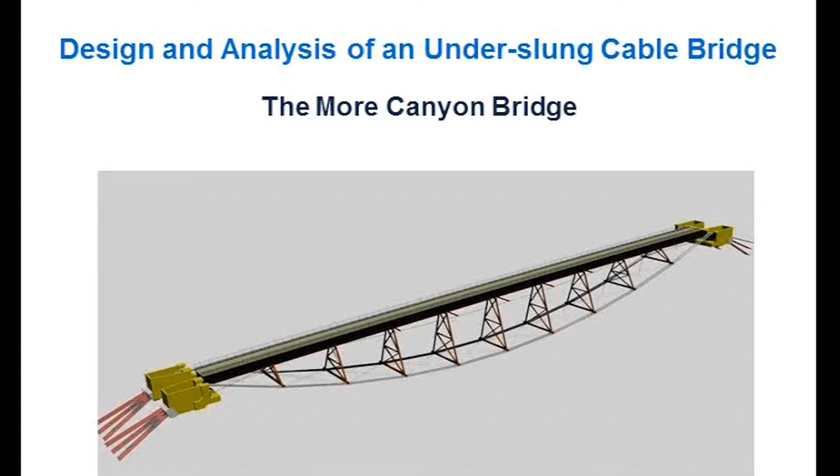The main topics we'll be discussing today are the challenges involved in the design and construction of an under-slung cable bridge. These challenges include the derivation of the main cable shape and length, the construction sequence of the semi-rigid structure, the girder launch itself, and the dynamic response of the bridge under wind and live load.

Do you have a question?

Hello. The owner of the bridge are the Galore Creek Mining Corporation.

Okay, actually, we'll answer that question at the end.

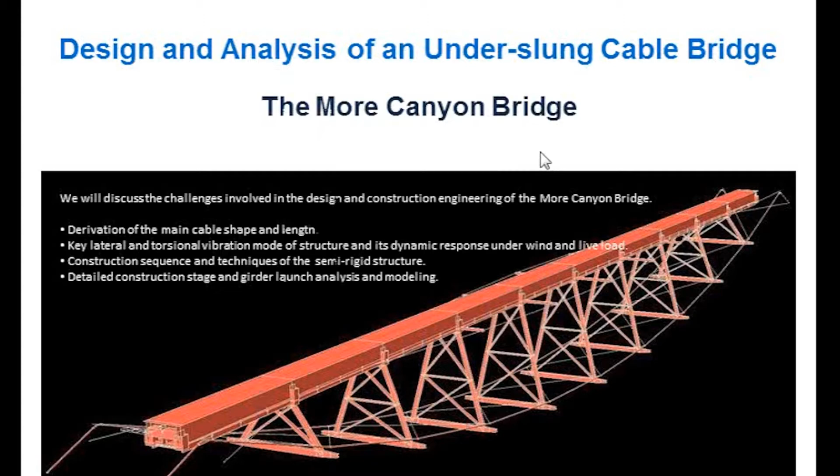Before we start on details, let me give you a brief description on the background of the project. The More Canyon Bridge is a part of the Galore Creek Mining Project located near northern BC, near Bob Quinn and Stewart. It's part of a mining road that will service the Galore Creek mine.

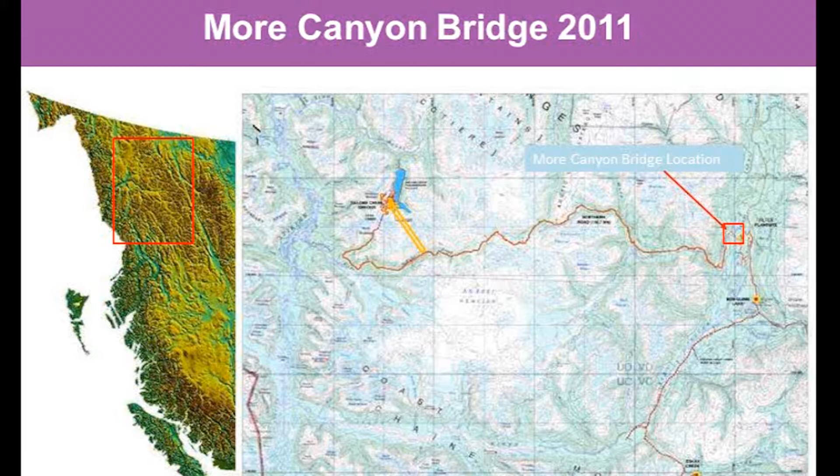The More Canyon Bridge will span an 80-meter deep canyon. It's a 200-meter clear span underslung cable bridge. Apart from the geography of the site, the project's complicated by high winds, which are funneled down the canyon, heavy snow accumulation during winter, and a steep mountain rock face.

The underslung cable design satisfies the criteria. The bridge is to be constructed at the top of the canyon with skylines, and the main girder is to be launched onto the semi-stiff structure composed of the main cable and the launch girders.

Now, due to the nature of the design, the bridge requires a unique construction sequence and could potentially be sensitive to wind and live load. Because of these concerns, a comprehensive study of the dynamic response of the bridge was completed during the design process, resulting in a design that greatly exceeds a scope that's typical of a 30% design.

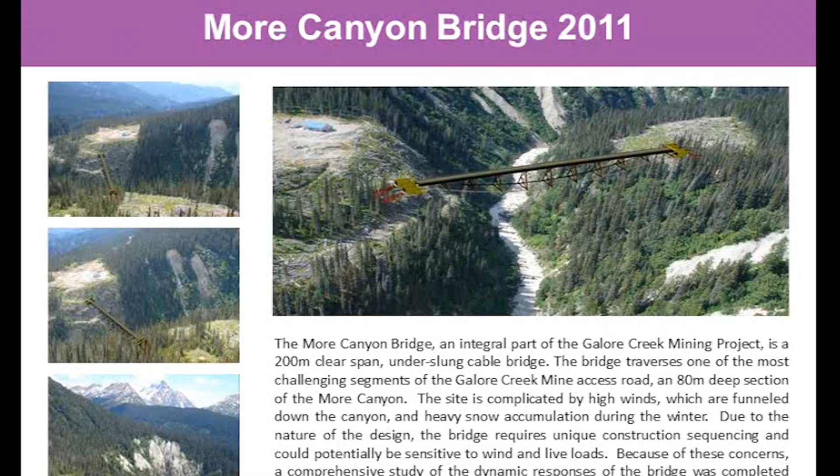Now, the bridge is composed of two 2.5-meter deep composite main girders supported by vertical struts at 20-meter intervals. The main cable system consists of two groups of four 105-millimeter diameter cables. These groups of cables sit 14 meters apart and are cross-braced with 35-millimeter diameter cables to provide a strong lateral truss system. In addition, there's two 75-millimeter diameter wing cables at the elevation of the girder.

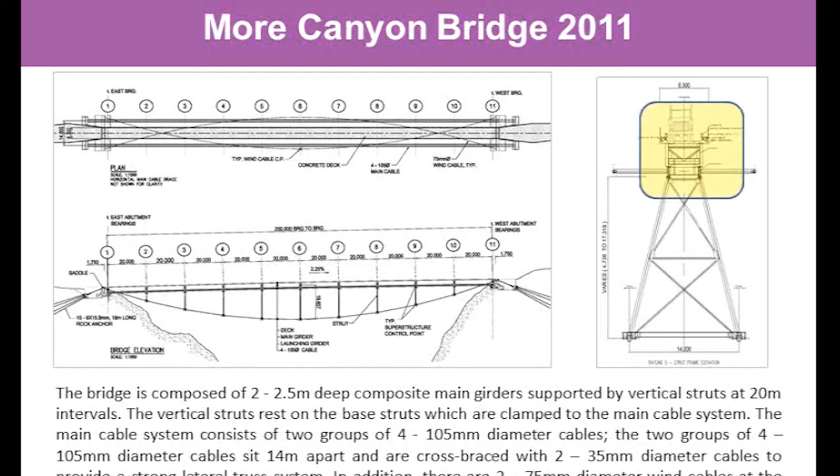Let's have a closer look at the roadway details. Here we have the composite main girders supported by vertical struts at 20-meter intervals. The main girder sits on top of the launch girders. We'll later see how the launch girders will first be erected to create a semi-rigid structure as a base platform for the main girder to be launched over.

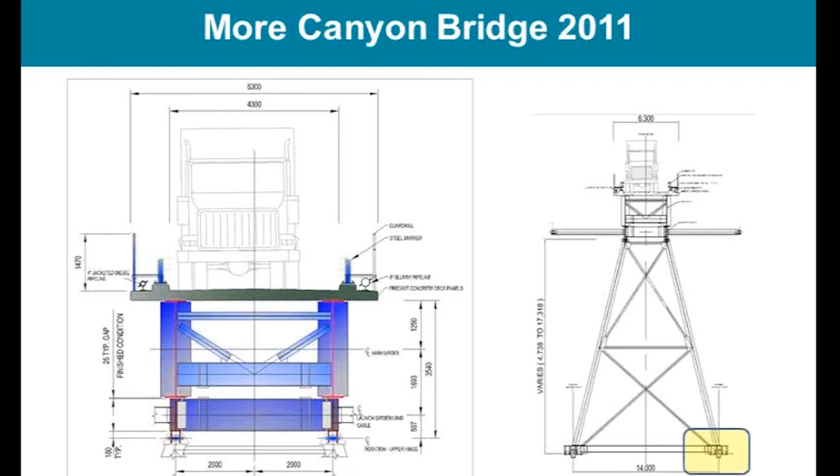The height of these vertical struts varies from 4.7 meters nearest to the abutment to 17.3 meters at the midspan of the structure. At the bottom, we have the struts sitting on the base strut units, which are clamped to the main cable system.

Here we can see the rendering of the strut and clamp system, as well as the cross-bracing cables. The cross-bracing cables are both over and under the main cable system. This ensures that all resultant forces will go through a common work point in the system.

Initially, the strut beam was designed to be hung from the main cables. You will see that in most of our model studies. This design was later changed in favor of having the struts sitting on top of the main cables.

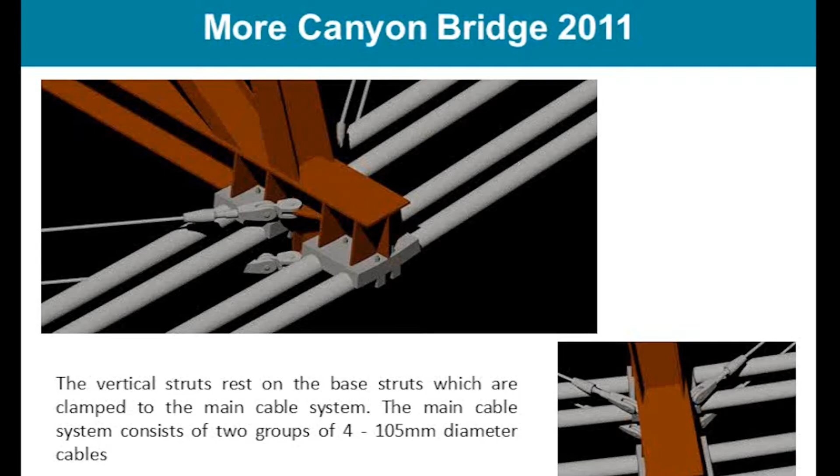A key component of the More Canyon Bridge project was the implementation of MIDAS as the primary analysis software. MIDAS excels in the analysis of cable structures with an accurate ability to model the nonlinear behavior of the cable stays.

With the shape and string length of the cable highly dependent on the weight of the bridge, an accurate accounting of the bridge elements and their weights was established early in the project. We wanted to use the suspension bridge analysis control in MIDAS to derive the main cable length, shape, and tension in the final condition.

Now, an obvious difference between the underslung cable system and the suspension system is that the tension forces in the hangers are compression forces in our case, in the struts. Other major differences also include the absence of backspans and towers.

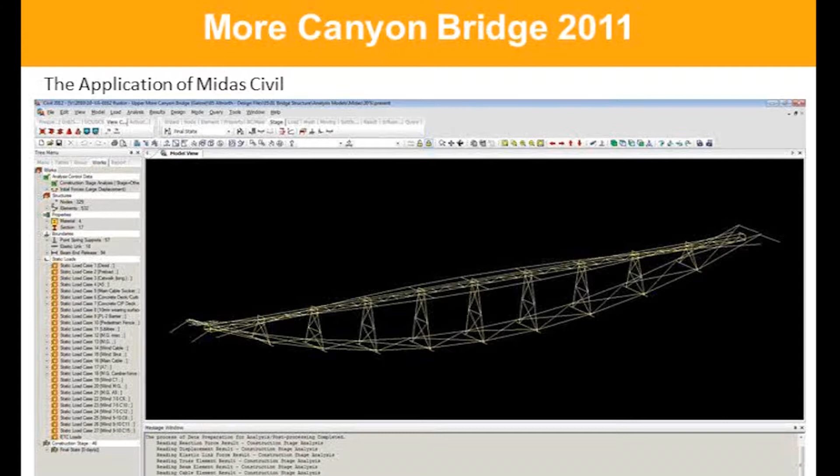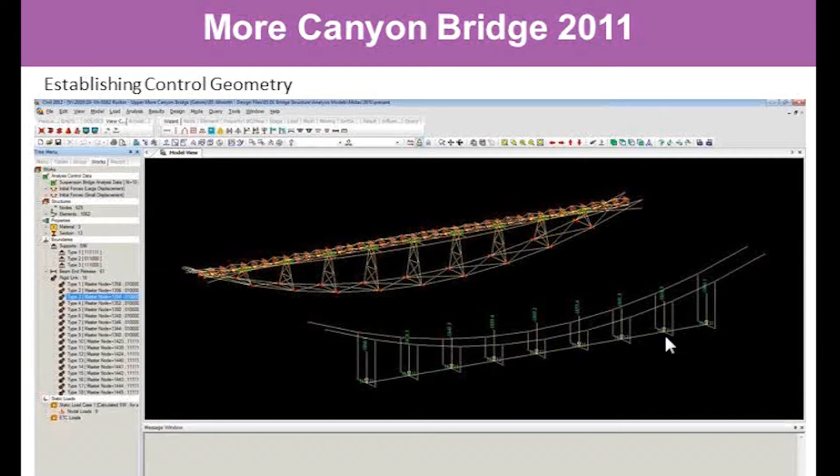Due to these differences, or just our input error, the suspension bridge analysis control was initially unable to compute the shape and tension in the cable based on the underslung arrangement like you see here. So what we did was create a suspension model based on our dimensions, along with the calculated dead loads applied along the bridge. We ran the suspension bridge control, and sure enough, it gave us the shape of the cable and the initial stresses. We then took the cables, deleted the suspension elements around it, and surgically connected the cable to our structural system, as you can see here.

Now these establish the first iteration of the forces in the main cable. They include the equilibrium element nodal table, the initial force for geometric stiffness table, and the initial force table. You can find a tutorial from MIDAS on how these tables are produced. With the use of the suspension bridge analysis control to determine the control geometry of the bridge, this is established under an idealized suspension system, where the deck and main girder is only used to account for the weight and not for the stiffness. So having established the initial forces and the shape, we introduced the data into the construction model.

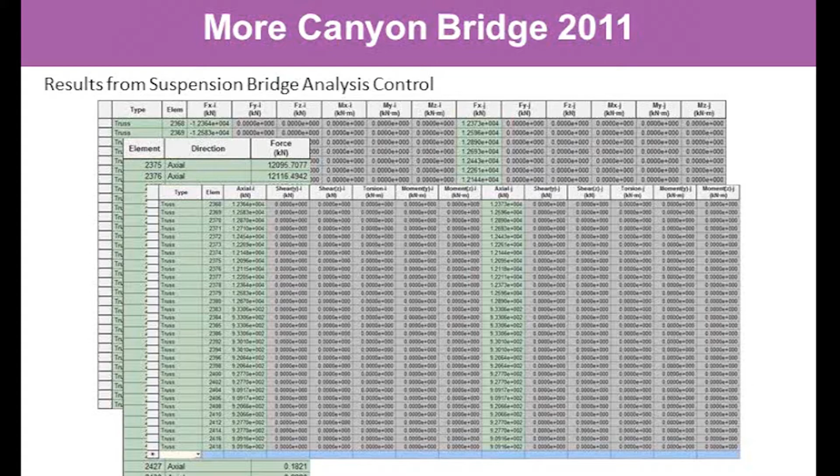The basic boundary setup of the construction model is shown here. We have pin support at the end of the cable where it's anchored in rock anchors, and roller supports at the end of girders. Also roller supports to simulate the saddle over the abutment back walls. Here you can see a rendering of the saddle structure.

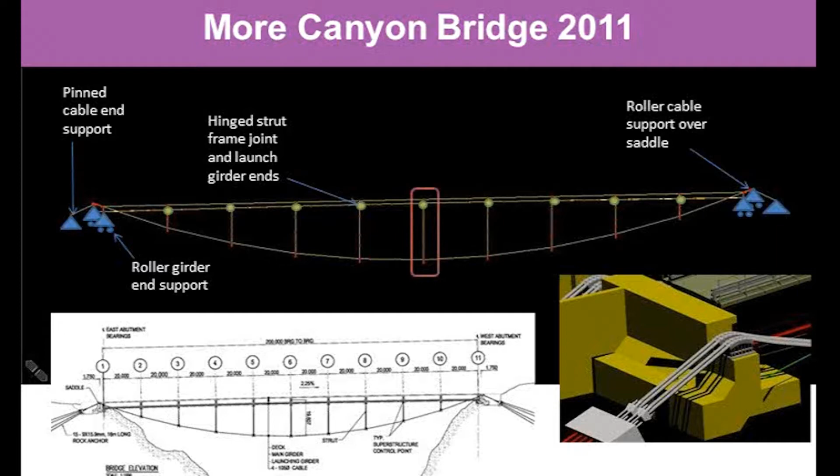The strut frames are hinged at the top where they're connected to the bottom of the launch girders. And the launch girders are hinged at their end, so they're simply supported spanning between strut frames. Let's have a closer look at the cross-section of the bridge.

As mentioned before, in an earlier version of the bottom strut beam design, the bottom strut frame is to be hanging from the main cables. This makes for easy construction because the bottom strut beams will naturally want to hang plumb, making installation with the strut frames easier. But the hanging pendulum effect will lead to no convergence in the model due to the fact that there are too many degrees of freedom in the system. We get around this problem by using an elastic link between the cable and the bottom strut unit and adding torsional stiffness in this link.

We used a single line element to represent the group of 4 main cables at each side of the bridge. This element is located at the geometric centroid of the cable group. We also used a single line element to represent the two composite main girders. This was done in order to properly capture the torsional stiffness of the box created by the main girder and its lateral bracing system. The torsional stiffness of the box cannot be captured by simple line elements laced together by bracing members.

The torsional stiffness of the main girder system was captured by creating a separate model, modeling the girder and the deck using shell elements laced together with lateral bracing elements, then applying a unit torque at the end of the box, which induces rotation. The torsional constant of the box is then computed using the following formula: J equals TL over theta G, where J is the torsional constant, T is the unit torque applied, L is the distance from the rotational fixity, theta is the angle of rotation, and G is the shear modulus.

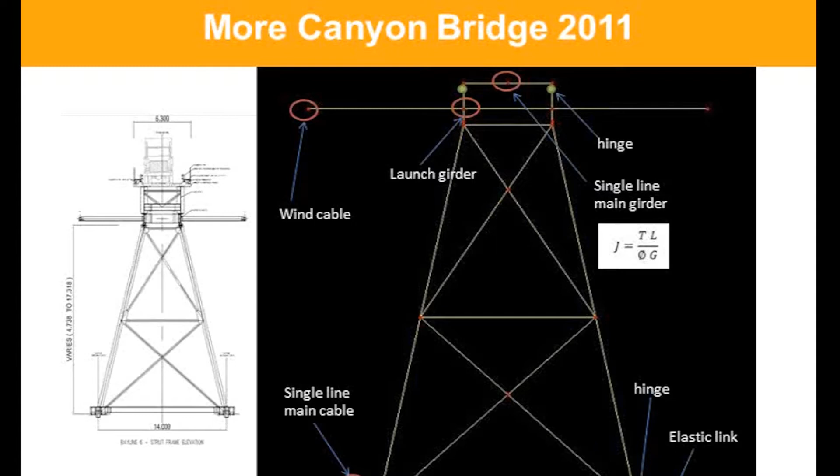This torsional stiffness was particularly important for this project because of the dynamic effect of wind and live load, which we'll later go into with more detail.

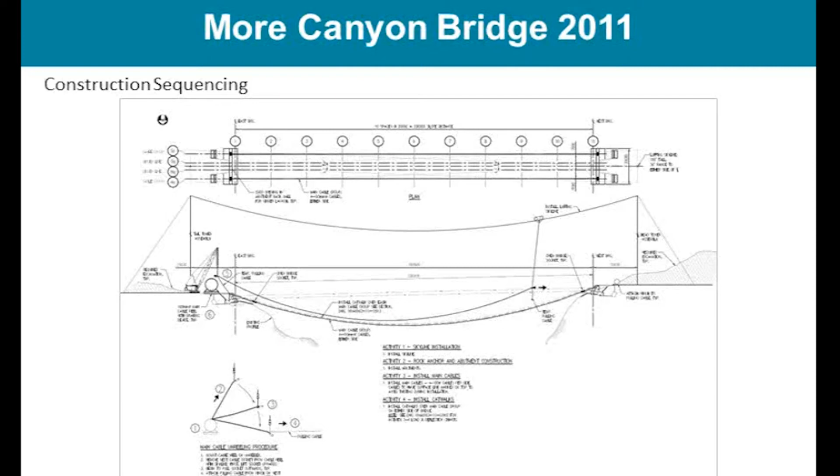It all starts with the construction of the abutments. Groups of 15.9 millimeter diameter strand anchors are embedded 18 meters deep into sound rock. These will provide an anchorage for the main cables.

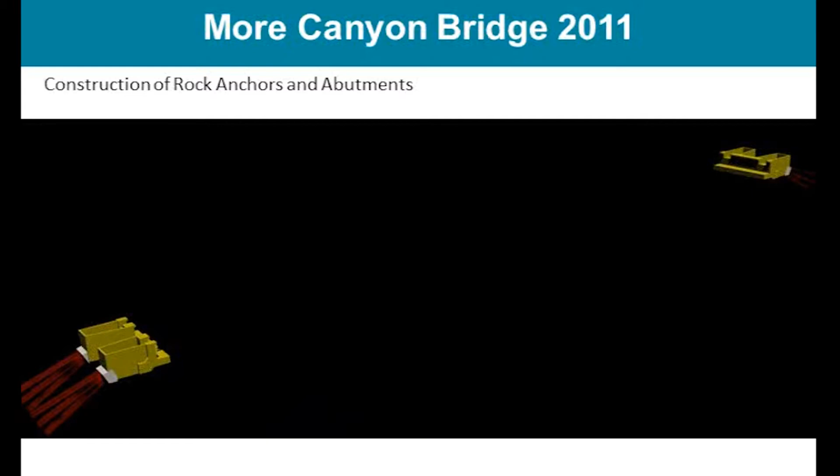105 millimeter diameter main cables are laid into position one by one. The initial position of the cable is approximately 1.2 meters higher than its final position due to the lack of dead load at the initial stage. Additional dead loads come at a later stage and will induce tension in the cable, hence elongating it.

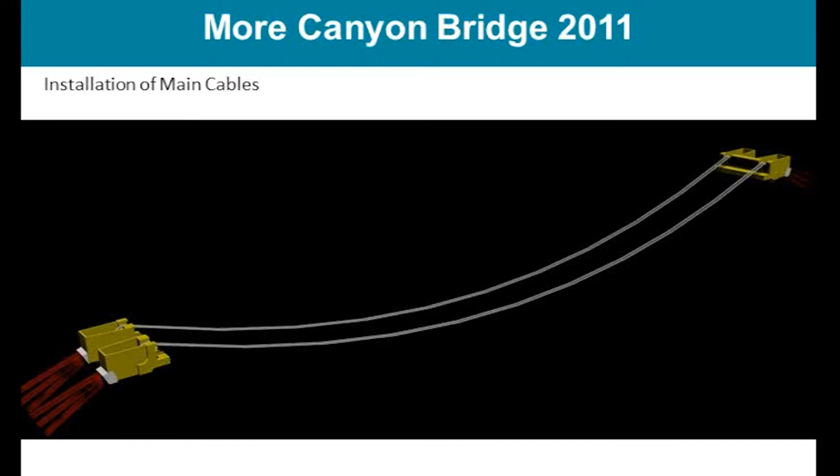Catwalks made of timber and welded wire mesh will be installed along the two groups of main cables, creating a 1.8 meter wide work platform along the two sides of the bridge.

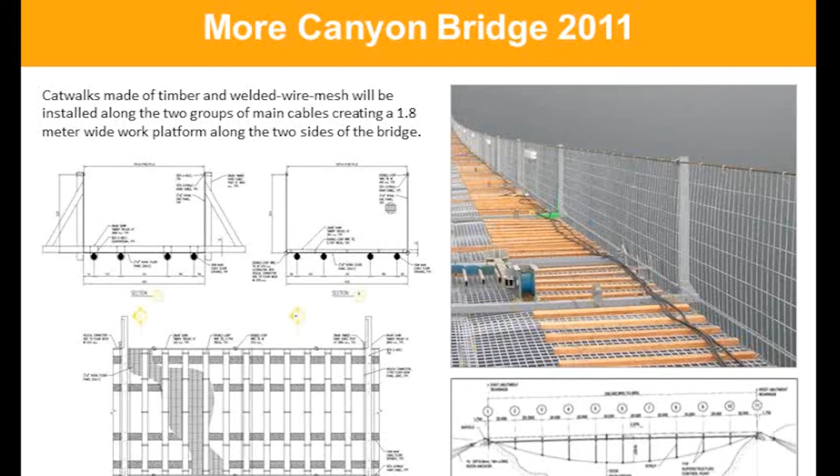The bottom strut beam, along with cable bracing, are installed bay by bay to create a strong lateral truss system and a base platform for future work to be built on.

The exact location of the bottom strut beam will be marked on the cable prior to shipment. This is done because the length of the cable will change depending on the construction stage, as well as the elevation of the cable will change.

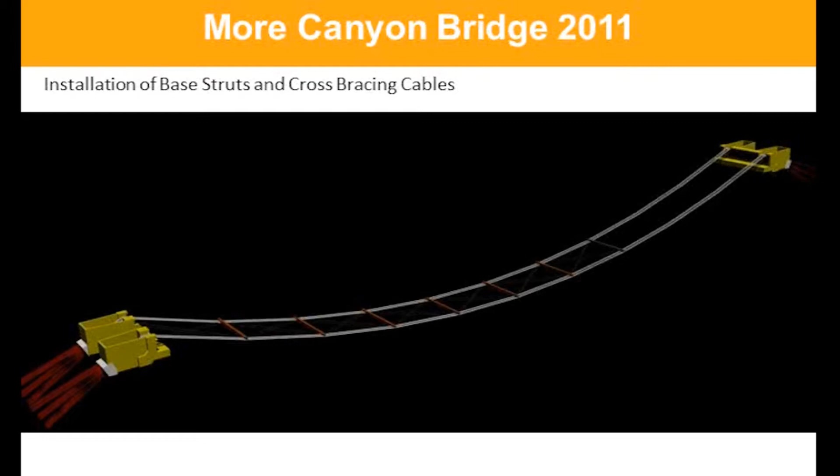Preloads of approximately 8 tons will be hung at each end of the strut beam. The preloads apply additional weight to the system. They stretch the main cable, making it stiffer, and also close the gap between the final stage elevation and the current stage elevation. This elevation change is required due to the rotational tolerance on the members to come.

Keep in mind that each joint installed at the construction stage will need to allow for rotation due to the constant changing of the geometry of the bridge.

The preloads may either be bags of sand, lock block, or water. With these preloads, we can create favorable geometry for future construction stages by adding or removing preloads at certain locations in order to raise or lower the position of bay lines.

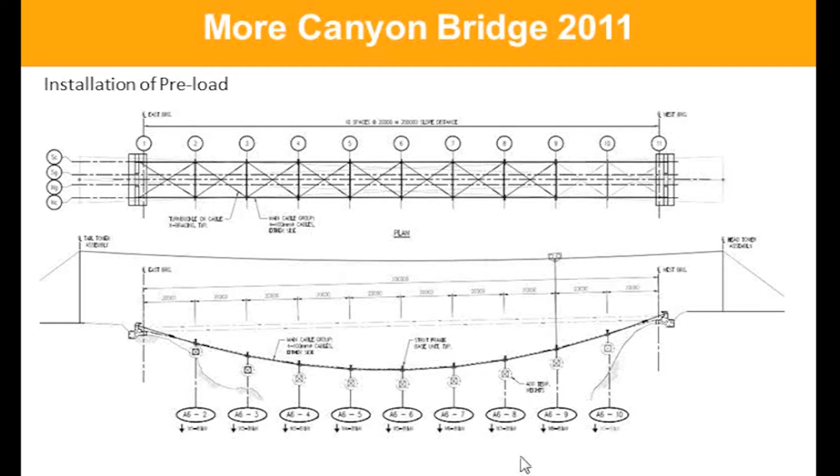The strut frames, as well as the launch girders, are installed bay by bay, starting from bay line 10. The launch girders are installed with a hinge at each bay line so that the system is flexible. The launch girder and the strut frame are to be lifted at once along with their bracing system.

The free end of the launch girder is pin connected to the adjacent launch girder. The system is then slowly lowered onto the bottom strut beam with Tirfors to ensure that it's in line with the bottom strut beam.

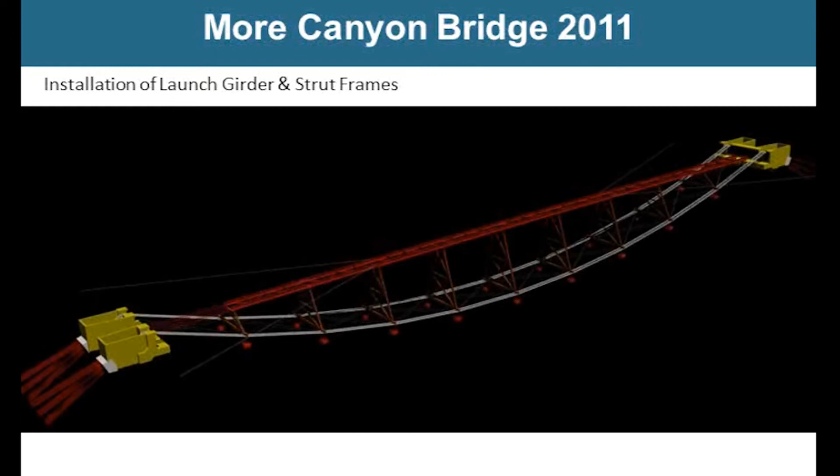The angle at the top hinge at each stage of construction is checked through modeling to ensure that no clashes occur. Cable saddles have a radius on them. By checking and keeping the cable within that radius, we ensure that no excessive stress is applied on the cable during the construction stage.

Wind load at the construction stage is particularly a big concern due to the fact that a significant amount of weight and surface area is added to the structural system, whereas the lateral system of the launch girder cross-bracing is incomplete until the last segment of the launch girder is installed.

During a wind event, the launch girder is essentially cantilevering from the fixed support at the west abutment. At this construction stage, the launch girder can experience the largest deflection. In order to reduce this deflection, wind cables are introduced into the system.

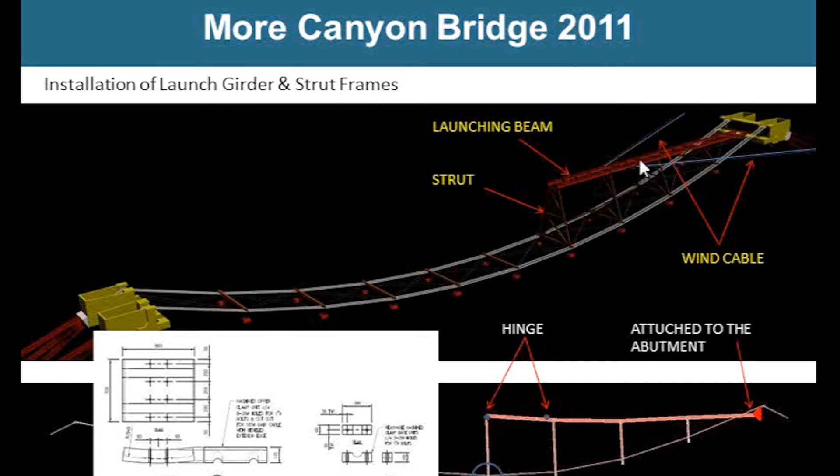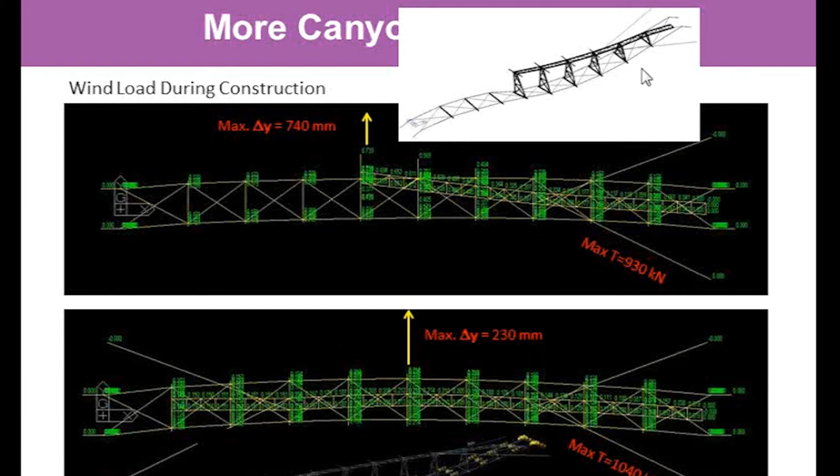Next, the wind cables are installed, strengthening the lateral bracing system at the girder level prior to the main girder launch. Now that the launch girder is complete with its lateral bracing system, it will become a launch platform along with the main cable system.

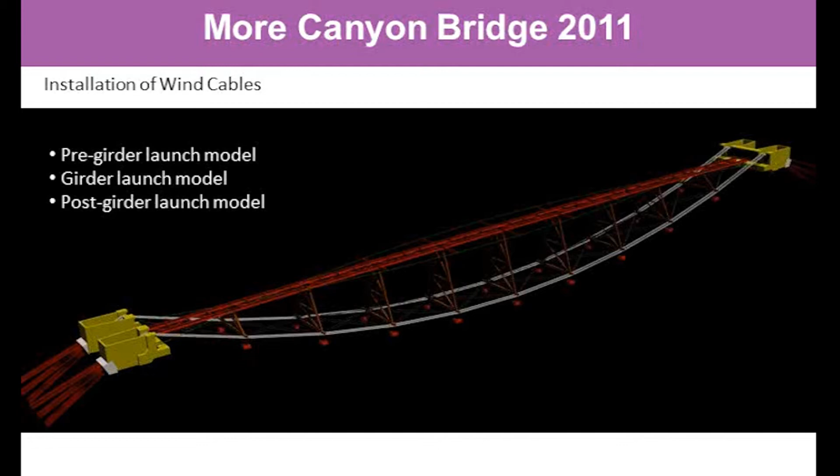To simplify each of the models we're working with, the construction stage model was broken down into three models: the pre-girder launch model, the girder launch model, and the post-girder launch model, which also includes the post-CS analysis of the bridge. So let's have a step-by-step look at the deflection of the structure in Midas.

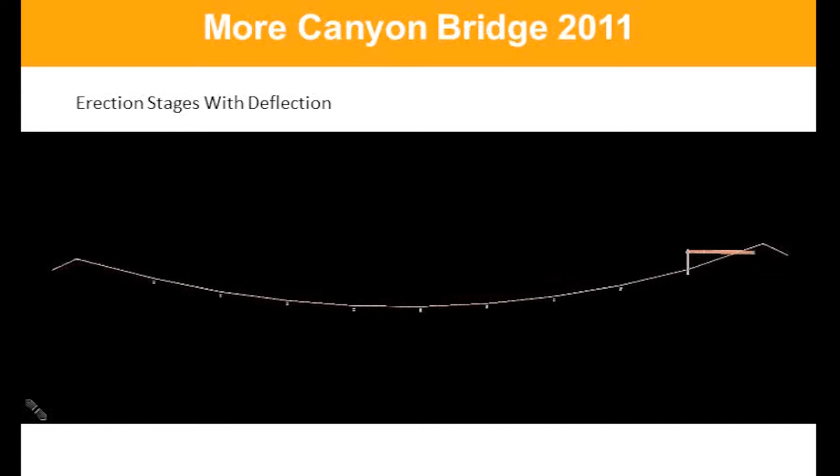The tuning of the preload arrangement through the construction stage had yet to be refined at this point of the analysis. Right now, all preloads are present at the stage after the installation of the strut beam to the end of the girder launch.

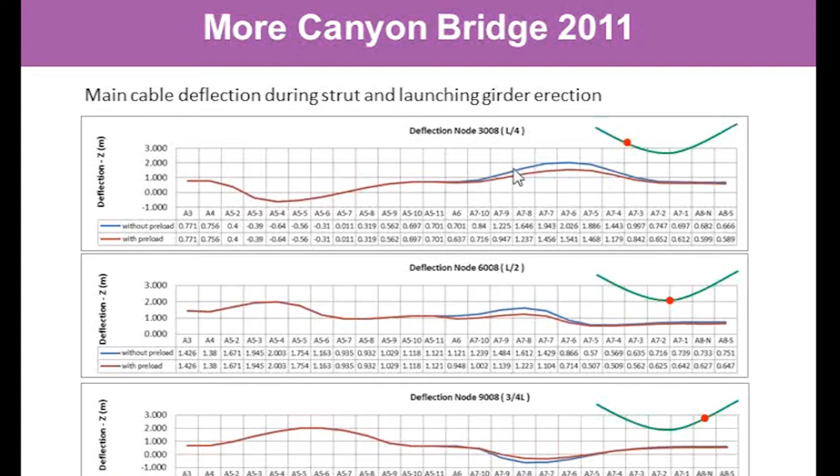There are a number of variables, challenges, and solutions to this procedure. The flexibility of the semi-rigid system composed of the main cable and the launch girders will deflect significantly during the girder launch. This soft platform creates a challenge since the support condition, elevation, and stiffness will be constantly changing. But several solutions have been utilized to overcome these challenges.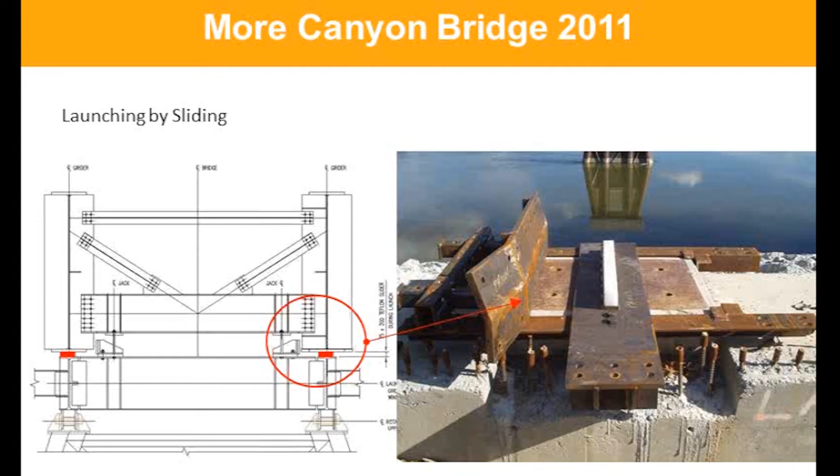A hydraulic controlled launch nose, capable of being raised and lowered to match the contour of the launch platform, is introduced. There's also a pin connection - a hinge connection between the first and second segment of the main girder, as well as the last and second-last segments. These hinges create flexibility in the main girder system.

This is important because of the difference in stiffness between the main girder and the launch platform. A stiff main girder and a soft launch platform can create an unpredictable support condition. Dangerous conditions can exist in the main girder if it lifts off between supports, which can significantly increase stresses in the main girder.

There's also the possibility of using the flexibility of the launch platform to our advantage. By rearranging preloads, we can raise and lower the platform contours to counter the deflected shape and create favorable conditions.

Studies have been conducted comparing the main girder with or without a launch hinge. Here you can see that the bending moment in the main girder is significantly reduced due to the introduction of the launch girder hinge. We can see the positive moment reduced at the front, and the negative moment reduced at the rear.

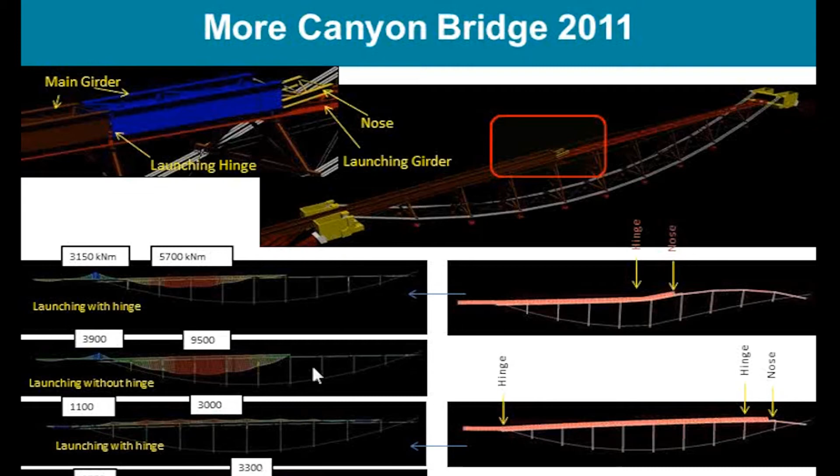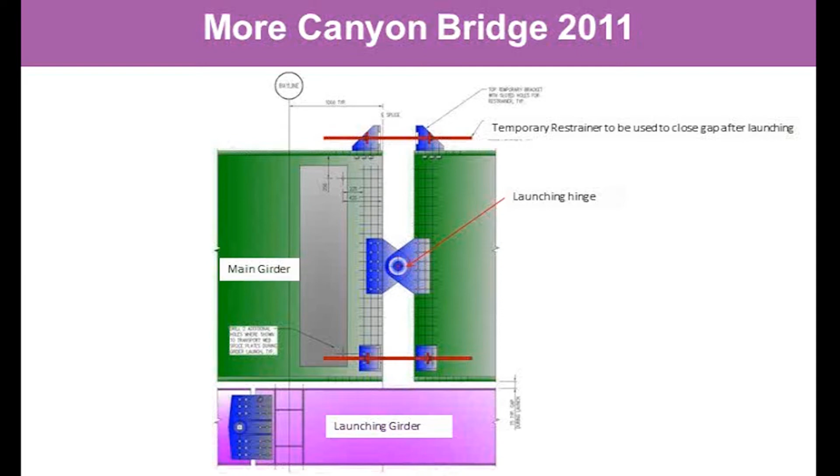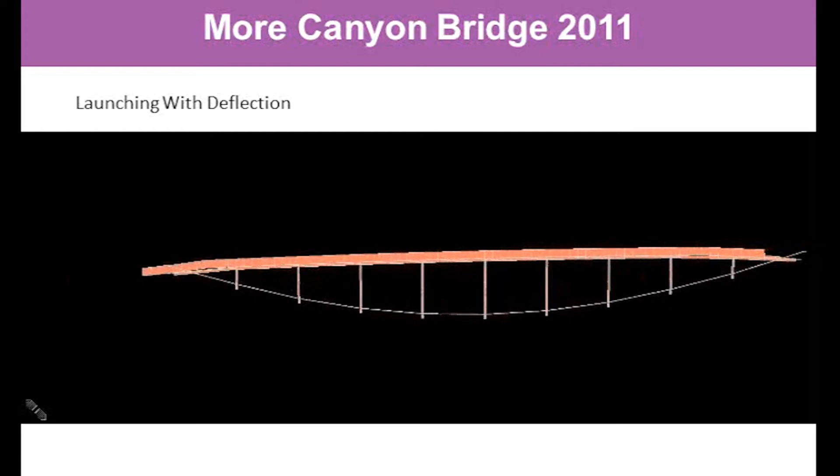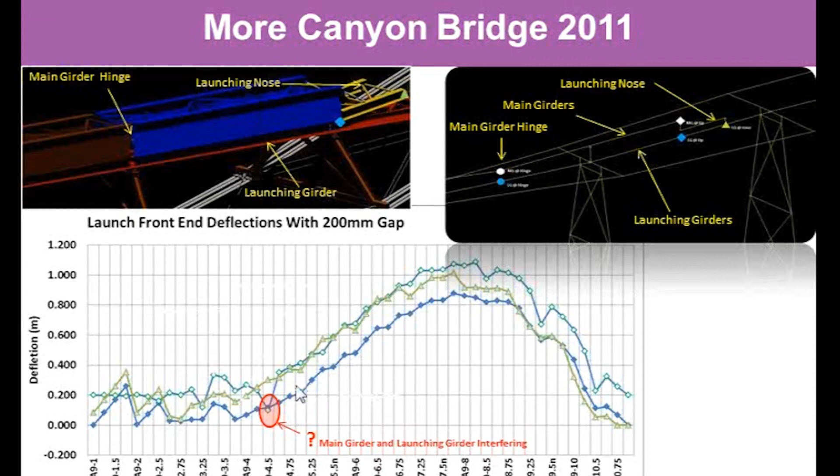Now let's have a look at the step-by-step deflection in Midas throughout the bridge launch. Here we can see the deflection of key locations in the bridge throughout the launch. The graph represents the deflection of the launch girder and main girder at the main girder tip, as well as the launch girder at the launch nose tip. Where these deflections meet, that means there's a clash in the system between the elements, and future launch models can be revised to resolve this clash.

Here we can see a graph of deflection at quarter points of the bridge, and how they behave with and without preload during the girder launch. Again, the vertical axis represents deflection, and the horizontal axis represents the step-by-step construction stage. You can see, in general, the change in deflection between stages is much gentler with the preloads.

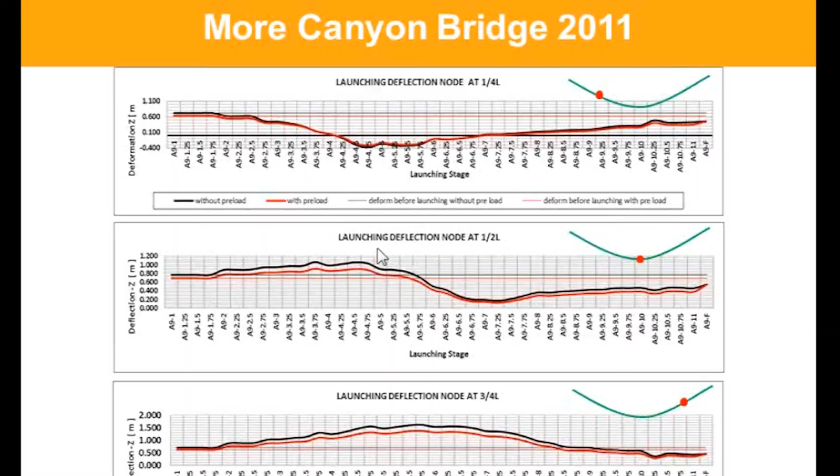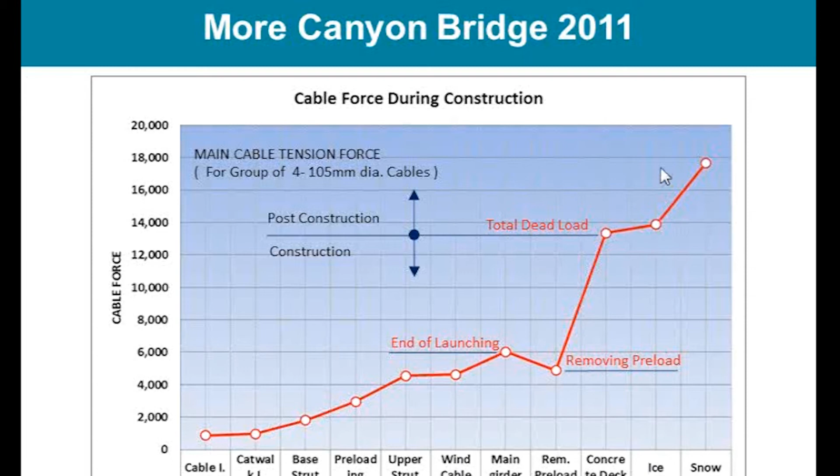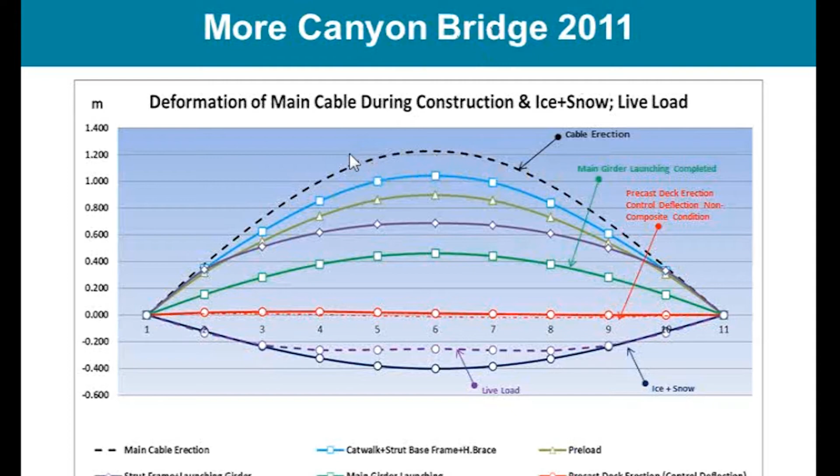The deflection of the main cable changes throughout the construction stage. Here the vertical axis represents the elevation of the cable compared to the control geometry, and the horizontal axis is the bayline of the bridge, the length of the bridge. The deflection of zero is targeted at the end of the construction stage, and we can see that the main cable, when first erected, is approximately 1.2 meters higher than its final condition.

The dynamic behavior of the More Canyon Bridge was closely studied in the 30% design. Primary concerns involve the aerodynamic stability of the structural system. We wanted to look for and avoid instability such as flutter. It's a self-exciting aerodynamic instability that can involve large amplitudes of torsional motion and vertical motion, as well as coupled motion.

Vortex shedding is a vibration that can cause serviceability and fatigue life concerns. We also want to look for galloping, which is similar to the effect at the Tacoma Bridge.

For this purpose, Derek Kelly and Stoyan Stoyanov from RWDI were acquired to conduct the wind tunnel study for the More Canyon Bridge. We're also concerned about the live load excitation of the bridge. Primarily, we want to investigate the appropriate dynamic load factor that should be applied. For this purpose, a rolling stock analysis was performed.

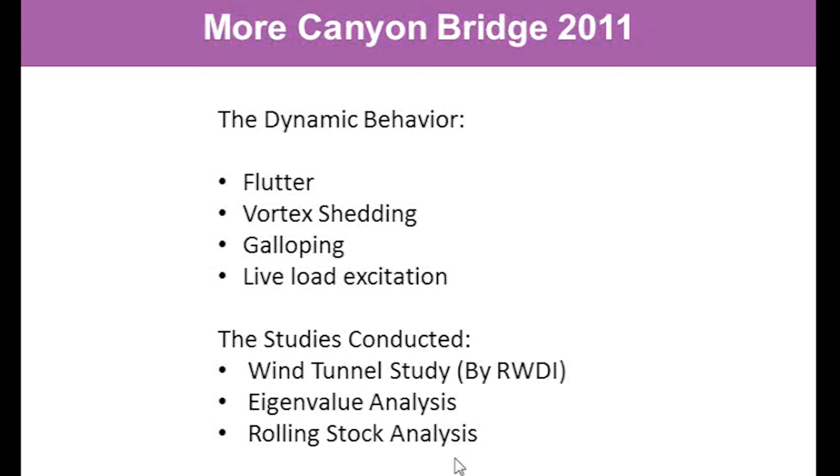Early in the design process, an eigenvalue analysis was conducted on the design. It's a model where we study the period of oscillation between various modes of vibration, with a particular focus on the first vertical mode and first torsional mode and the ratio between the two. The closer these two modes are together, the more likely dynamic effects such as flutter and galloping can occur.

Therefore, it's of particular importance that the torsional stiffness and behavior of the bridge was captured accurately. Part of capturing the torsional stiffness was to model the bridge system with an accurate torsional stiffness composed of the box effect of the main girder system.

Another part of capturing the behavior was to be diligent in accounting for the polar moment of mass existing in elements which don't contribute to stiffness but contribute to mass. This is where the center of rigidity and the center of gravity are offset from one another. In our case, additional rotational mass was added along the center of the main girder, applied using the nodal mass function in Midas.

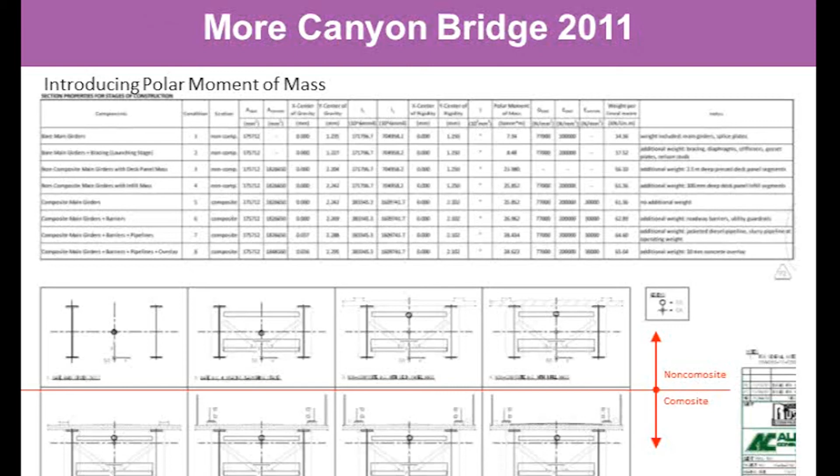Now let's have a look at some of the vibration modes created through Midas. We start with the construction stage vibration. Here we have the first vertical mode. Here we have the first lateral mode. Here we have the second vertical mode and the first torsional mode.

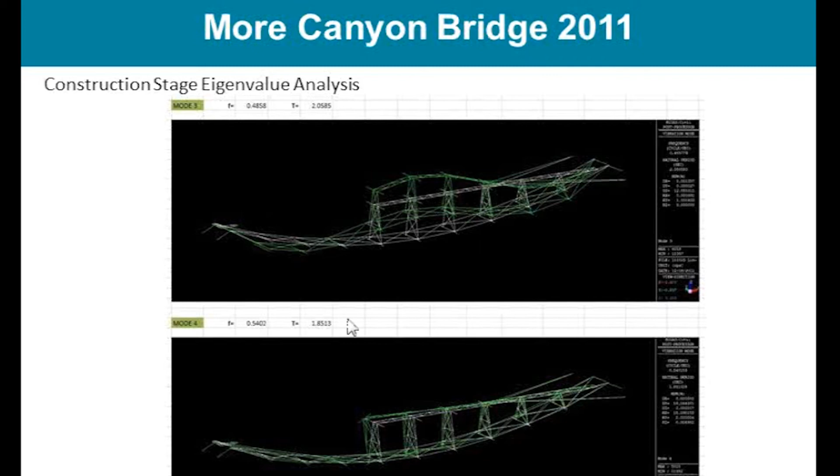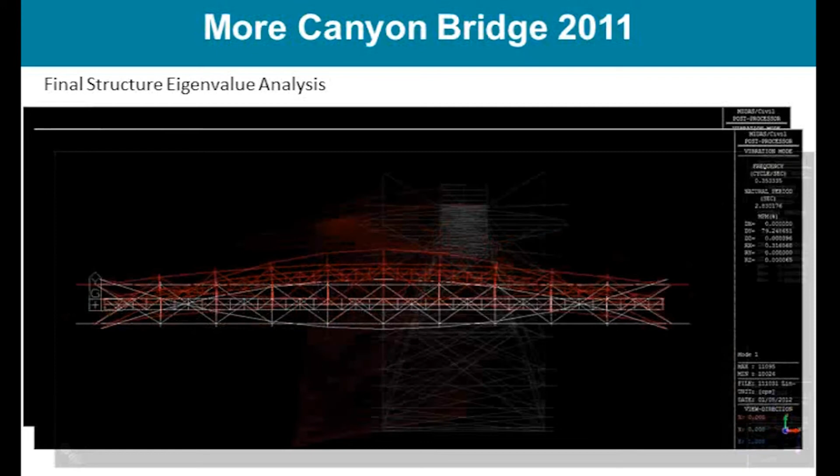Now we look at some vibration modes for the completed structure. This is the first lateral mode, shown from the top and from the end. You can see that there's a little bit of rotation in the system as well.

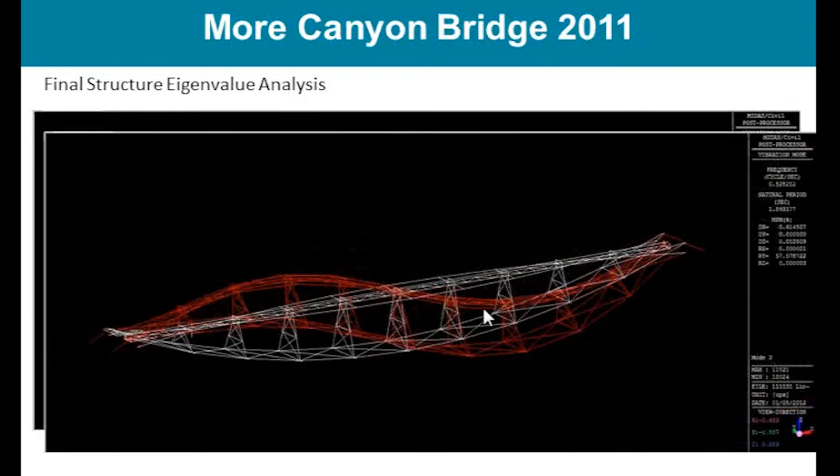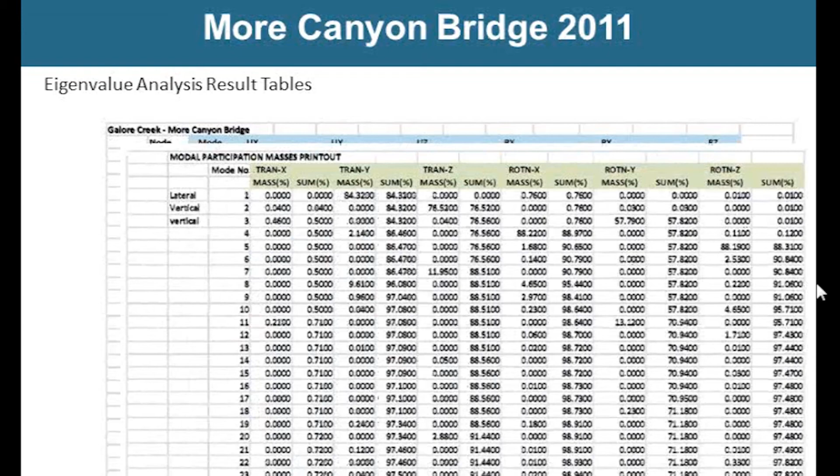Here we have the first vertical mode, the second lateral mode, and the first torsional mode. Midas compiles the output of the eigenvalue analysis, and here we can see the frequency of each mode. The ratio between our first vertical mode and our first torsional mode is approximately 1.4. Ideally, you want to be in the range of 1.4 or higher. Then there's the mass participation table. These are all very useful pieces of information for us and the guys at RWDI.

RWDI was retained to conduct the wind tunnel study of the More Canyon Bridge. The natural mode shape, frequency of the bridge, topographical data, as well as meteorological data were provided to RWDI in order to conduct the topographical study, buffeting analysis, as well as a sectional model test.

A scale 1-to-3000 topographical model of the More Canyon terrain was produced to study the effect of the canyon on the wind load at the location of the bridge. A scale 1-to-30 sectional model was created for a 60-meter segment of the bridge to study the aerodynamic stability of the bridge cross-section.

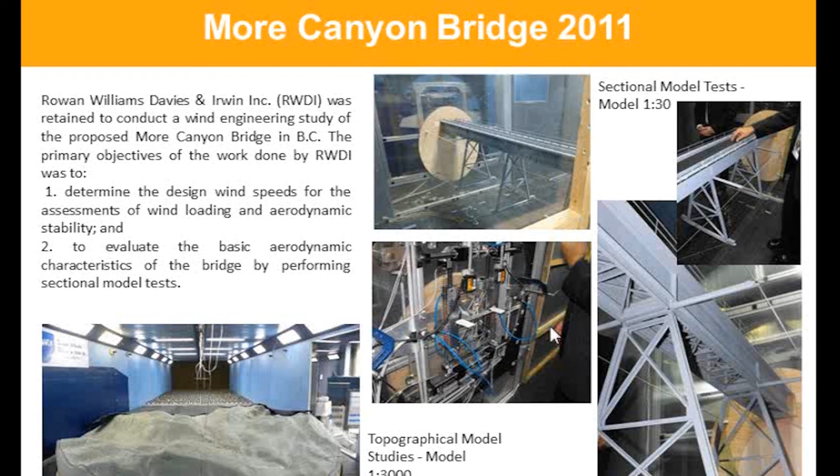The sectional model captures the characteristic height of the bridge, mass of the section, and the first vertical, lateral, and torsional vibration modes of the bridge. The vertical and torsional stiffness and damping of the bridge were captured using coil springs at the ends, which make up the end condition of the model.

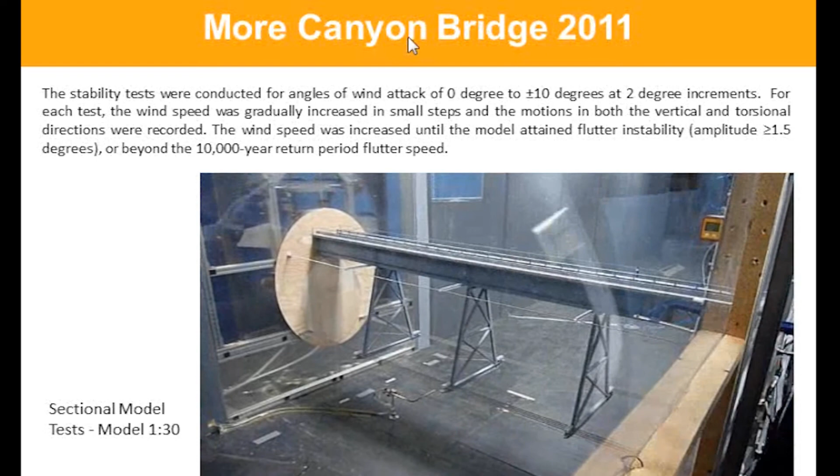Here we can see the sectional model in the wind tunnel. Variables in the wind tunnel testing include wind speed, angle of attack, vertical damping and torsional damping, as well as smoothness of turbulence in the airflow.

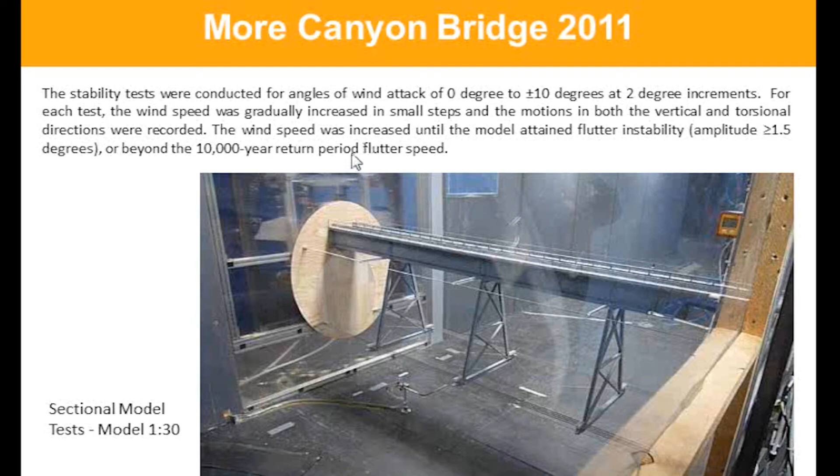The percentage of damping in the structural system is a critical unknown to the study. The level of damping can dramatically change the result of the test, but unfortunately, the damping can only be accurately measured once the structure has been constructed.

You can see that the motion is created by hand at the end of the bridge. We're just testing the stiffness of the bridge by hand. You can see that the bridge is quite torsionally stiff.

Vortex shedding was discovered as an effect that can occur at a 1-year return period wind event. This does not create a critical load effect, but it can be uncomfortable for occupants. It's a serviceability issue. No flutter was detected, but galloping can occur under very low structural dampening, and a slight increase in the structural dampening or increase in the turbulence in the airflow can suppress the galloping.

They have found that for the More Canyon Bridge, due to the effect of the canyon terrain, the local wind is likely to be very turbulent.

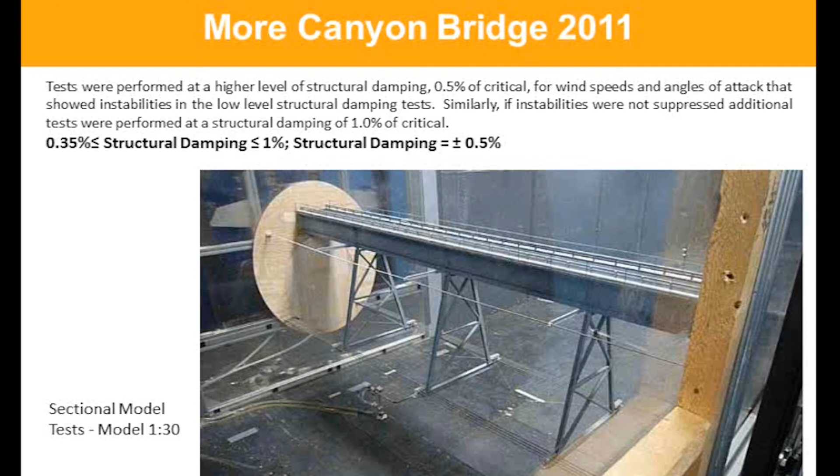Mass dampers and wind fairings have been recommended for the More Canyon Bridge in order to create a favorable response during the wind events. Here we can see some concepts of the wind fairings that are applied over the mid portions of the bridge.

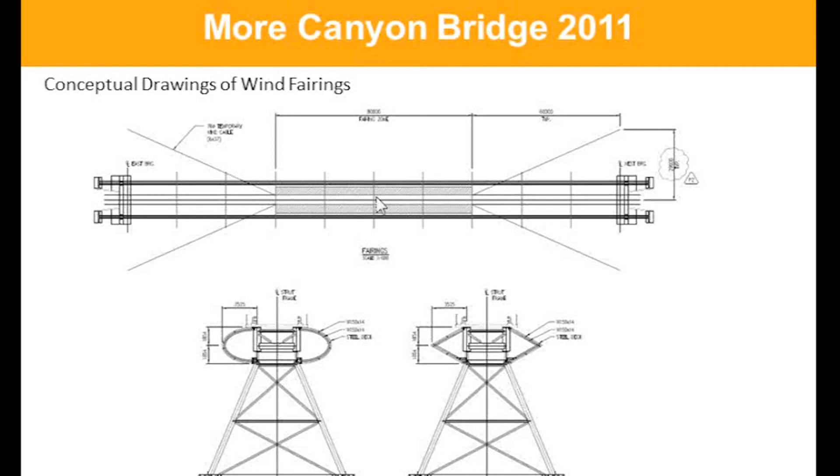The results of the RWDI study come in various wind load combinations. These combinations have been amplified by buffeting effect, which is a high frequency instability that can induce an impulse of load increase. 10 wind load cases were applied in the final model, but here we can see an example of one load case that is applied.

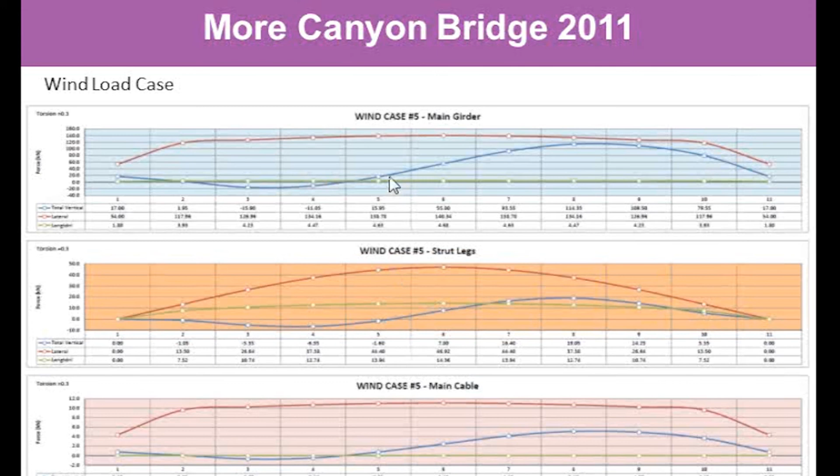The rolling stock analysis for the More Canyon Bridge was performed in Midas. For our bridge, we were concerned about the live load excitation, and this is associated with the dynamic load factor that's appropriate during the analysis of the bridge components. We studied the effect of the vehicle running at different speed, spacing, and eccentricity from center line of the road.

This forcing function will be applied on the node along the main girder. For our model, there are 801 nodes spaced at 0.25 meter spacing. This spacing is due to the tire width that was assumed for the analysis.

Each node is set to run the forcing function at a different start time, so that the node would run the forcing function one after the other. This creates a wave effect that runs along the bridge, similar to a wave that you could create with a crowd of people, each going through the motion of standing up and sitting down, but doing that one after the other.

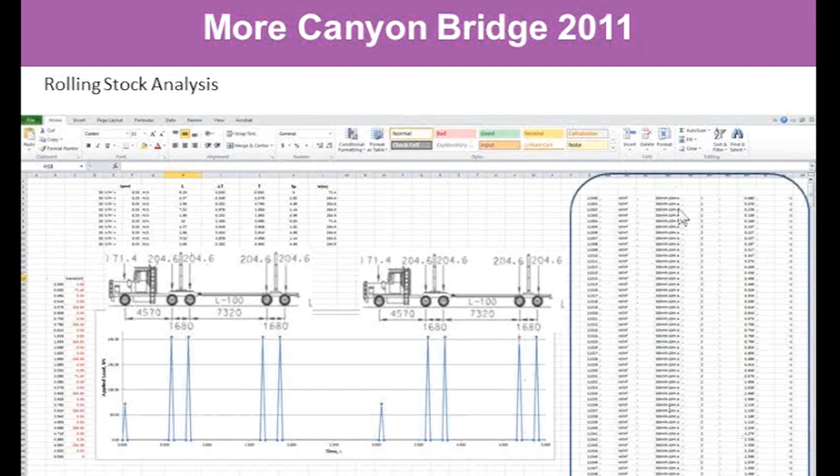You can imagine applying the forcing function on 801 nodes at different start times is a tedious task. So for this purpose, we created inputs like on a spreadsheet, like you see here, and utilized the MCT function of Midas. The MCT function is basically the analysis model that's displayed in lines of code instead of a graphical display. In this case, this was very helpful for us, where we could copy and paste lines of code from the spreadsheet into a text editor.

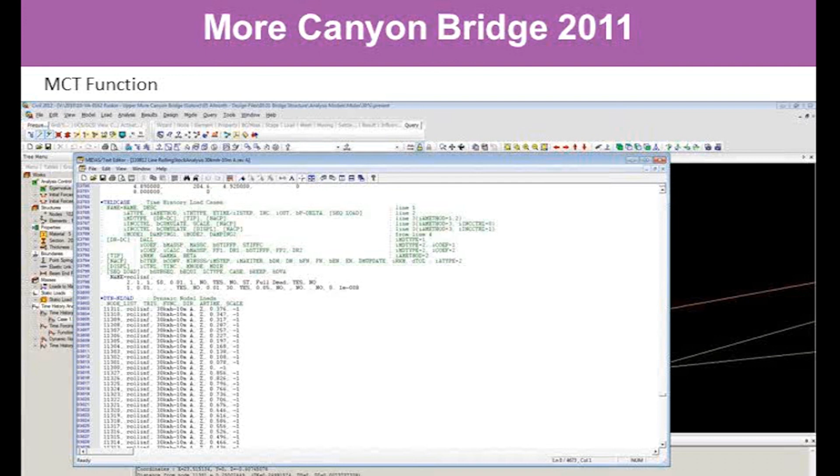Here we can see the rolling stock analysis in action in Midas.

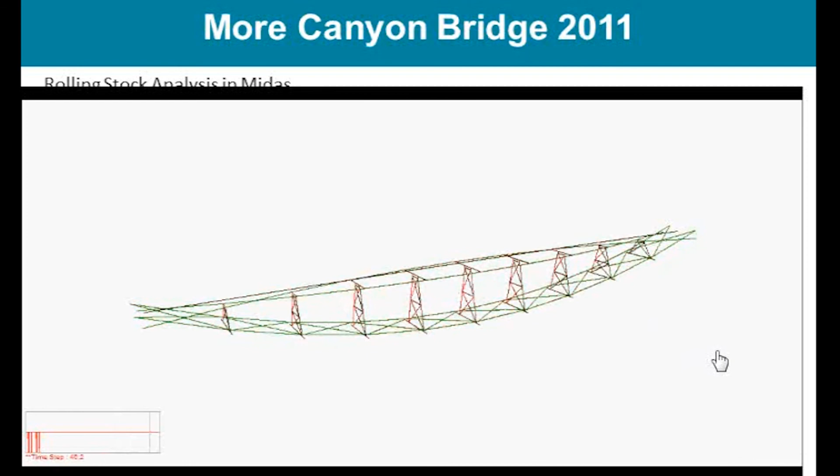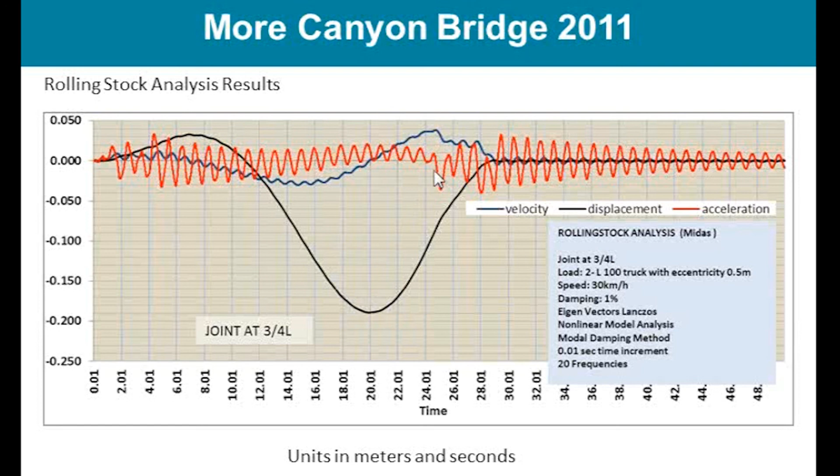...elevates as the cable tension increases. And as the vehicle approaches, the node slowly deflects, and this is where the vehicle is at the 3/4 point of the bridge. And here is when the vehicle leaves the bridge.

So overall, we find that the bridge is not very sensitive to live load excitation. But that's not to say the surface of the bridge will be perfect and there won't be bumps on the road. Therefore, we still apply the dynamic load factor of 1.25 as recommended by the bridge code.